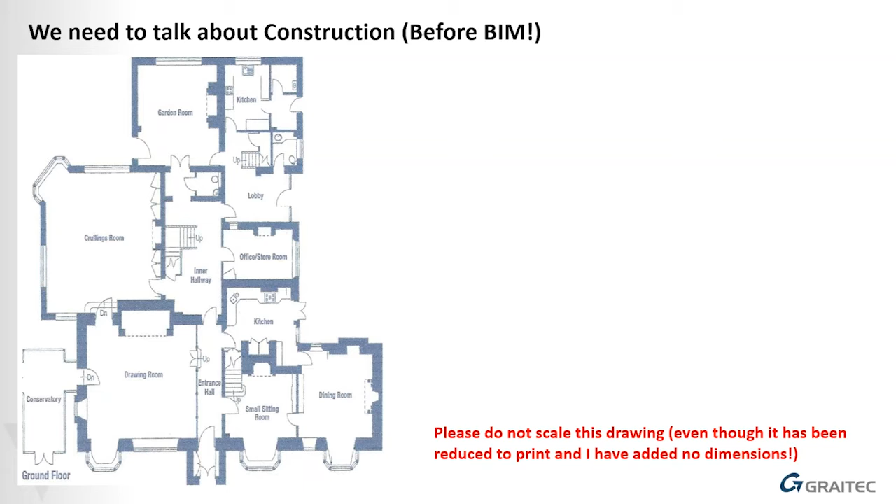So first question is, what is BIM? Before we actually go into looking at aspects of the products, we can consider what BIM is. Before we even start looking at BIM, we need to talk about what the construction is. First of all, the communication of our content, our design intent, what file formats we'd use, what methods we'd currently use, whether that be hand-drawn, whether that be CAD, two-dimensional.

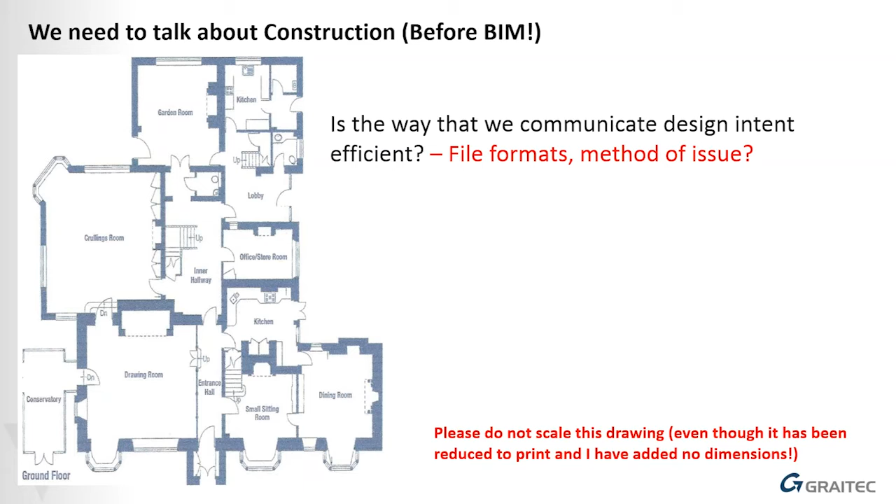We'd also need to be able to collaborate that information with our supply chain. Do they trust the information that we send? Is it correct? How much data do we actually provide for them? And have we looked at taking advantage of other technology that's out there? A lot of people still consider that they're happy with just using two-dimensional CAD and not even interested in looking at other solutions that may be out there.

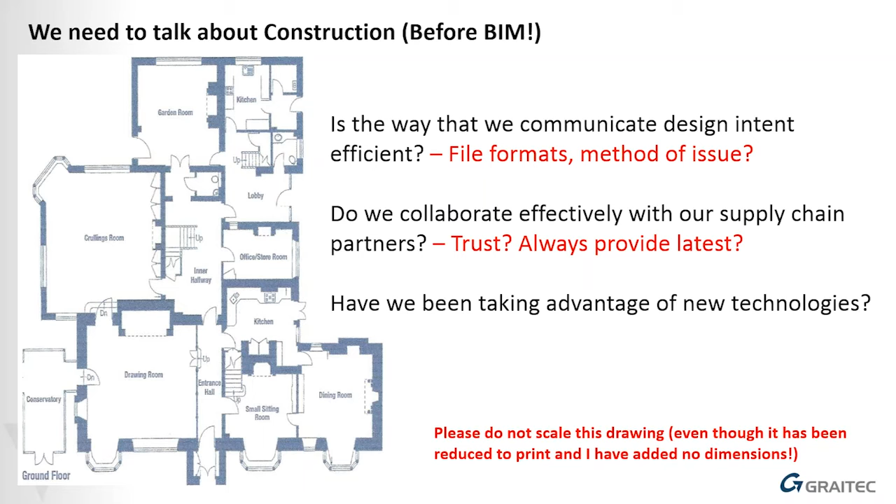Obviously things like Revit are a solution that offers a bit more than what AutoCAD can do, but still produce the two-dimensional information. So if we ask the question, what is BIM? Building information modeling - it's been around now for a number of years. A lot of people may know more about it, some people may not know much about it. But BIM is a process that generates digital aspects of a physical and functional characteristics of a model, or information provided as data throughout the project.

So if we think about this, why would we need to do BIM, and why now? Well, one of the key things is obviously the government is stipulating any government project by this year must be provided in a BIM format.

We've also got to consider that BIM is an intelligent model-based process that provides value across the life cycle of a project. So it's not just the consultants building a model and providing two-dimensional data to the contractor and the client - it's a life cycle, so you're providing a three-dimensional design in a model, but still producing the information in the form of drawings like you would do normally.

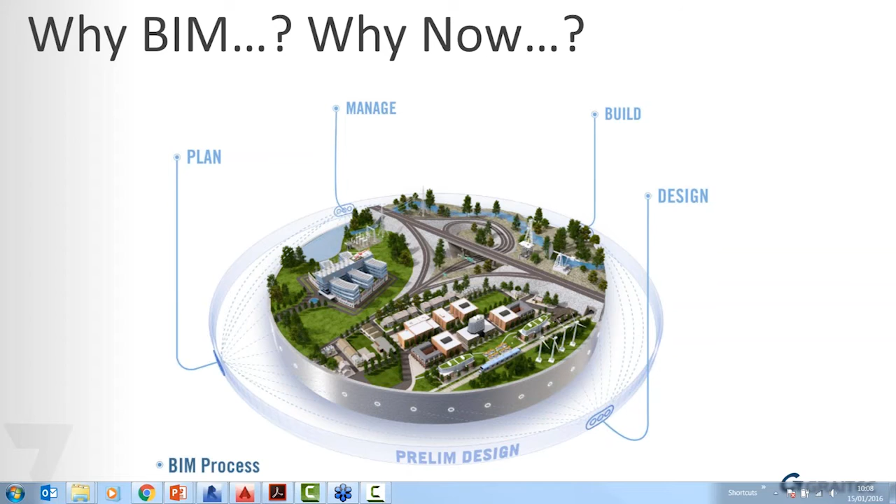And it's a process that's creating intelligent information that can be used in the full life cycle of a building, so it can be passed on from the consultant to all the aspects of the design, so the contractor and the client.

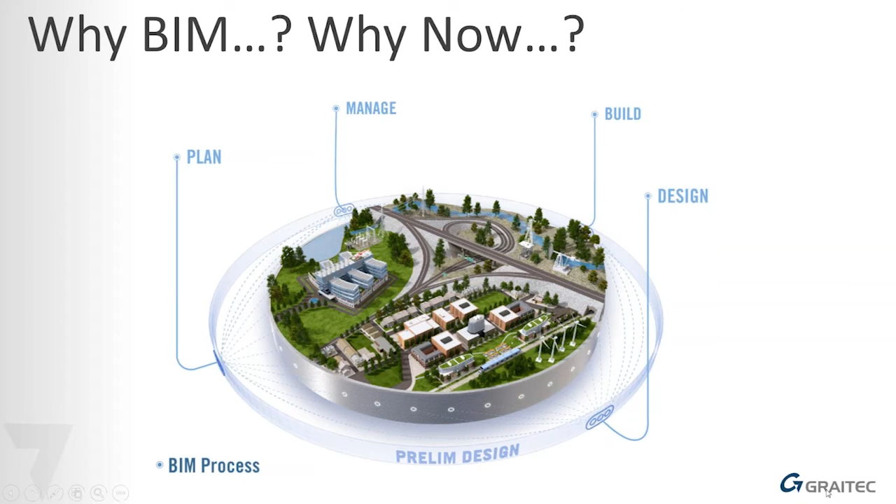If we consider what it can do, BIM drives a more efficient workflow, helping you coordinate information between others, whether that be the design team, the contractor, or the client. It makes for greater precision in information, as you're modelling the full three-dimensional elements of the building or structure you're considering.

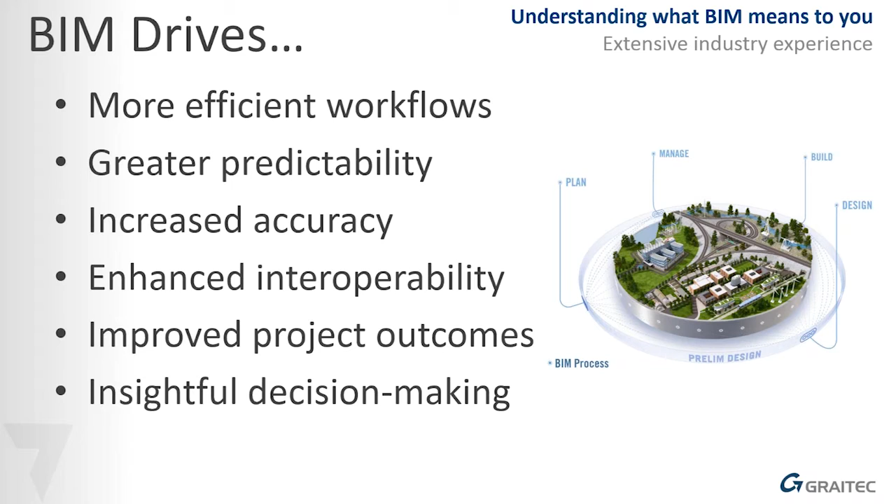It should improve the outcomes you get from a project, because all the data you're providing can be provided on an earlier basis rather than later in the design. It can also inform decision making throughout projects, such as what to use for construction, and if the information is clear and works, you can potentially iron out issues before you get to site, rather than having to down tools once there.

So the advantages of using BIM are that it has the intelligence that allows you to collaborate the workflow better, so you can simulate the performance of the buildings, or structure, or whatever it is you're going to do.

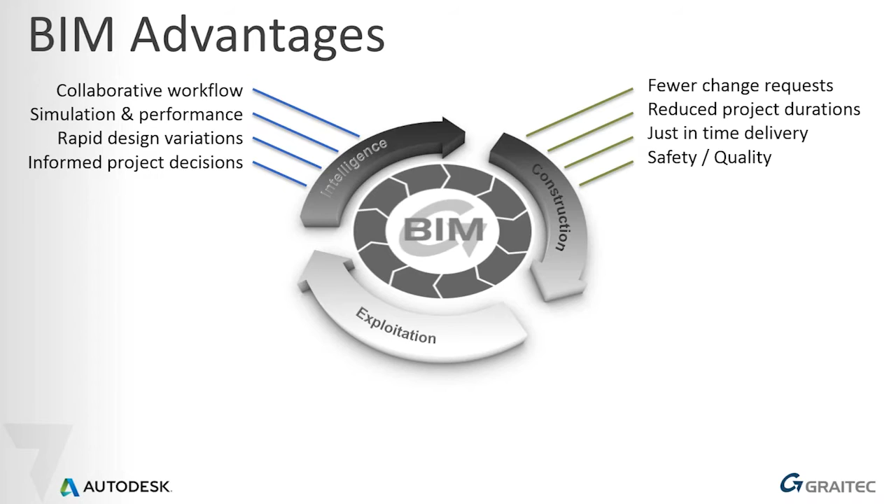The construction should hopefully reduce the number of RFIs you may get, be able to deliver on time, and even look at things like safety before you have to deal with issues on site.

More efficient buildings means you can also look at the analysis of the building structure before you get to site, not afterwards.

You can also produce a fully working, fully graphical model, for example, before you get onto site, so you can see potential issues or potential changes you can look at.

One of the key advantages is that the government is looking to reduce things like cost. Obviously, the cost of building structures today has rocketed in price, so they're looking to reduce that.

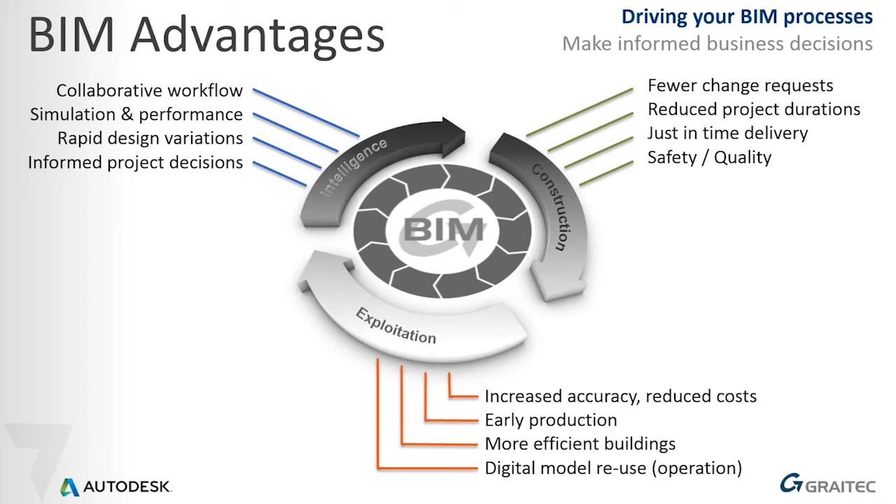So if we look at the difference between your standard old ways of modelling or drawing, you're producing just two-dimensional data. Now using things like BIM is going to help you still produce your two-dimensional data, but it goes further than the standard two-dimensional drawings you had before, producing a model-based design where you can get the two-dimensional information from.

It's intelligent with data-rich information. So for example, you place a door in, you can specify the manufacturer, and all the technical information associated to that door can be placed in there.

You can keep all the information centralized, so it can be saved for later use through the life cycle of the building or structure, whatever it may be, so the information can be utilized again and again.

You can collaborate that data with the facilities, so if anything needs changing, you can have all the technical information stored within that model or in other data sources.

It helps coordinate information more with the supply chain, so you can data drop information from the model and provide that to a supply chain, giving them more information they'll require at an early stage rather than later on.

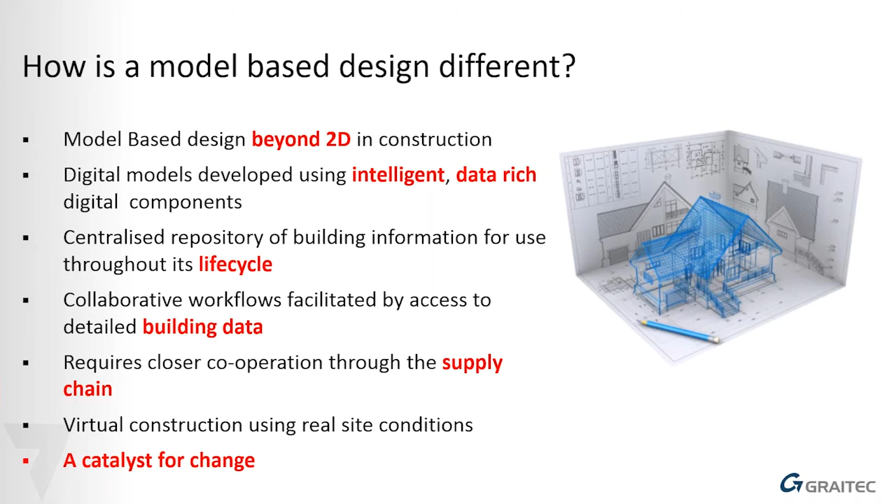And it's a good way to look at your virtual environment before you've even constructed it.

One of the approaches you consider is the design and construction of documentation deliverables. We can build a model quickly for early stage concept, providing the documentation needed. We can also change the level of detail into a more detailed model and perform realistic visualizations if required, for clients to see what it could look like before it's built, so changes can be made if needed.

We can look at construction site simulation, so we can see potential issues on site that we may find. For example, you may need to move some temporary works, put in cranes, etc., and move them on and off site. So sometimes if you've got a site that's too small and you can't store products on the site, you have issues with storage, and we can simulate that with the tools you can use from Autodesk, for example.

Quantity takeoff is probably a key thing, so you want to know the quantity of information in the doors, windows, etc., and look at costing. You can take the technical information from a model and deliver that information more accurately than before.

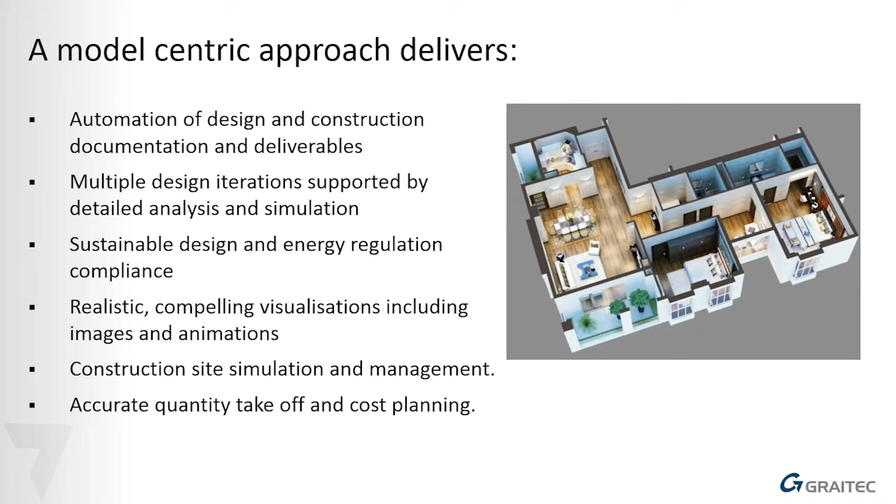One of the key things is that the government has mandated that by this year we must provide level 2 BIM to work on all government projects. Obviously this is looking at reducing things like cost and wastage when working on a project, predominantly government projects, but from what I can see myself and others in the environment, that potentially is happening across all projects, not just government related ones.

BIM has been a fast growing thing in the industry for the last number of years. By 2025 the government and the construction industry are looking to reduce costs considerably, emissions from sites, and greenhouse gases while building construction, and also produce faster construction times, so less downtime with building, more efficient buildings, and improve how we work with suppliers.

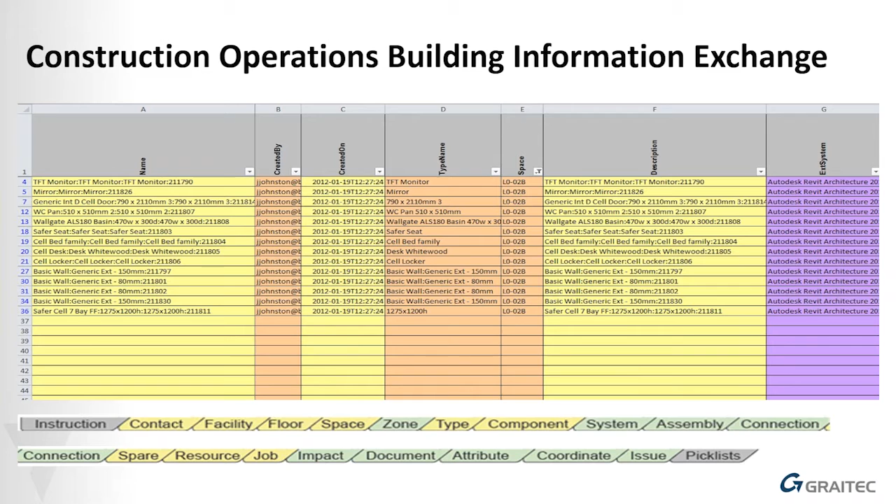BIM itself - some of you may have already seen this graph, it's been going around for a long time, and there are loads of different variations out there. Level 0 we've probably all been doing for many years now. Level 1 is another aspect that's been around for a number of years. A lot of people have been aspiring to move into Level 2, which is more predominantly producing three-dimensional models with intelligent data that you can export and collaborate on with others across a vast variety of industries and contractors. Level 3, from what everyone can see, is not a viable solution yet, but that's where we aspire to be.

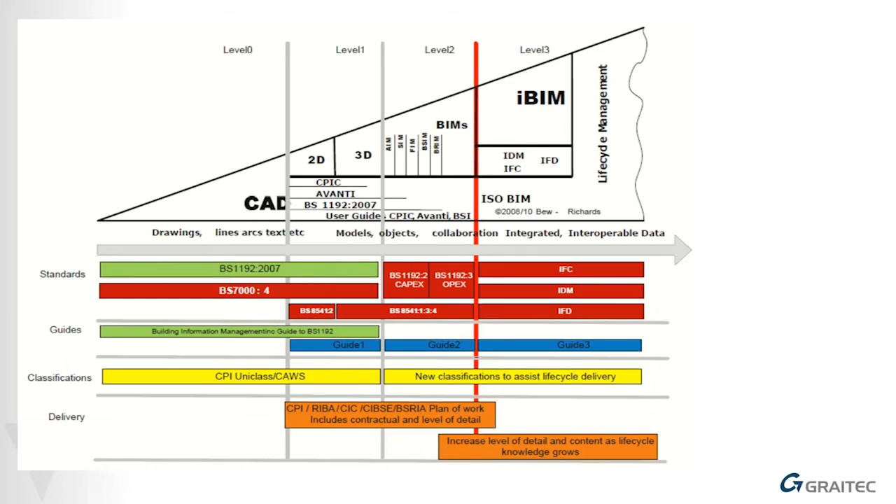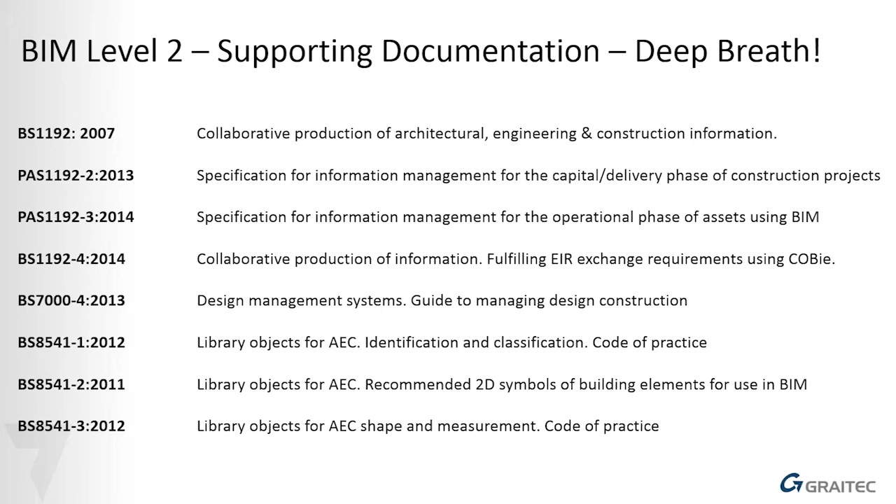For Level 2, there's quite a lot of supporting documentation you can get through British standards - a vast number of PAS documents now, PAS document 2, 3, 4, 5, and I believe 6 now, if I remember rightly. There's a number of documents you can download from the web, plus other documentation like BIM protocols. BRE also supplies some information.

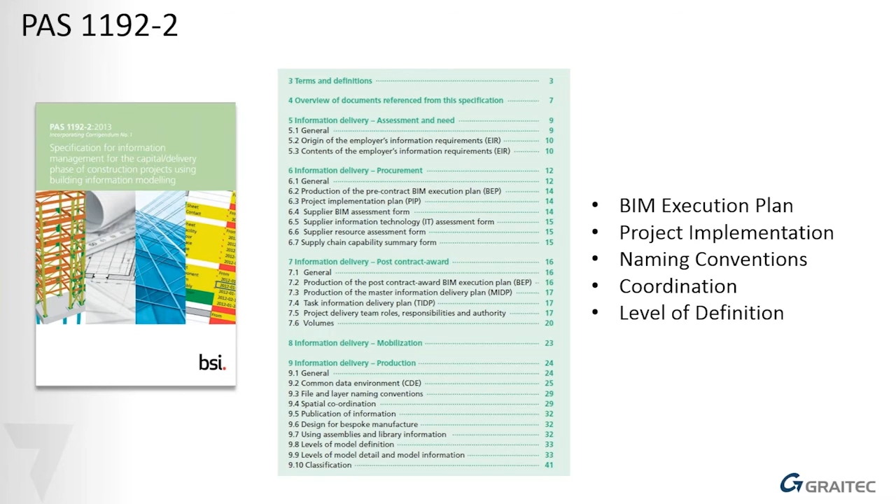PAS 1192 was a document that basically took over from BS 1192, helping you manage your project information - things like naming conventions, coordination, the level of detail that needs to go into your models, and BIM execution plans. It tells you about the project and how you should manage the data and what levels of progress you should be at, so you can distinguish whether information is from the working project you're currently on, being shared with others, being checked or approved, or going on the lines of completed.

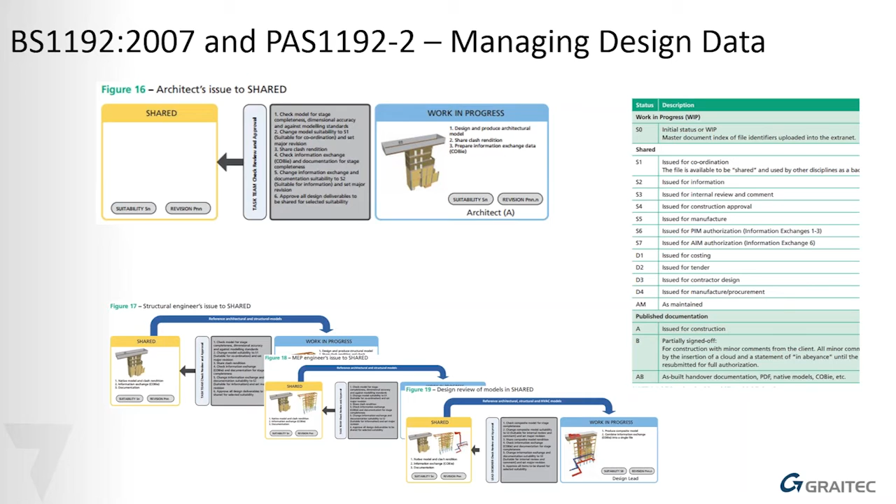Level of detail - you may be looking at a very early stage concept, where the detail of information can be kept quite basic, in the form of shapes and massing, going all the way over to handover, where it's a fully detailed concept model with all the components required within the building.

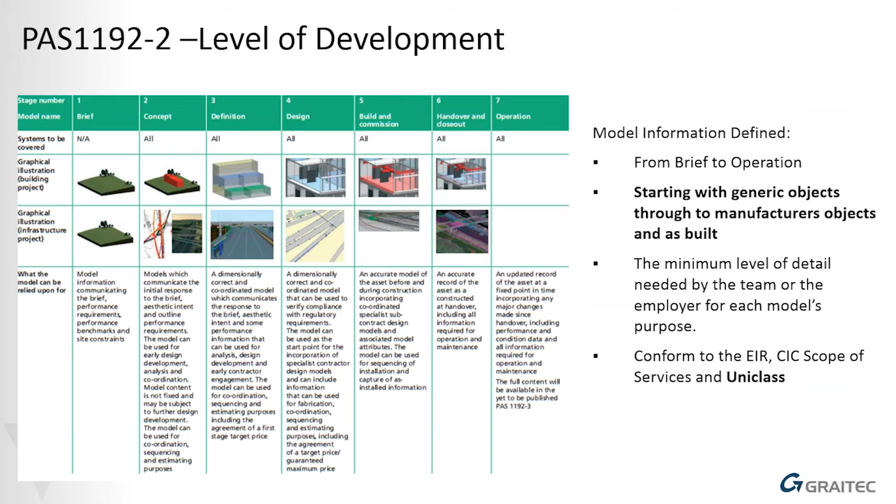BS 1192 looks at layering names and things like that within your models, drawings, etc., so all the information can be provided. It knows where it's come from, and the information is clear with all the data provided in that drawing, model, etc.

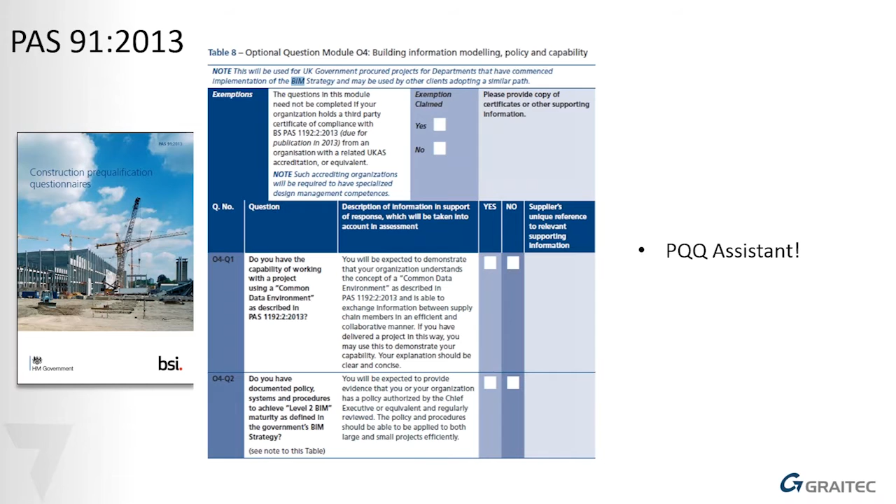So there's obviously things like PQQs that need to be answered within a project. You can download data from the web, from the BSI, which will help you fill out those PQQs.

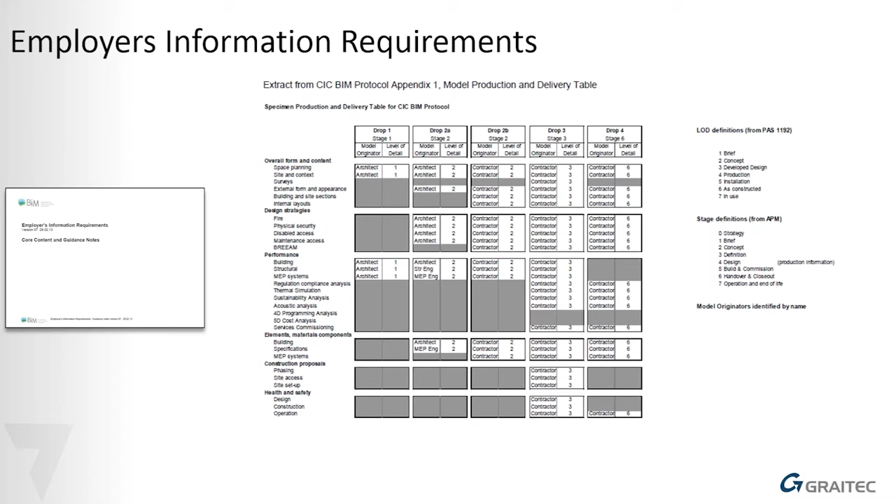Employer's Information Requirements is another content that you can get from the web, which helps you with all the data and information that employers require from BIM.

Moving on a little further, asset management. As you take the information further, there's PAS 1192 Part 3 that will give you that information. It's a lovely good read.

Some of the deliverables and goals that you can provide within the projects, what information is required at levels, and the data you're going to provide within the model.

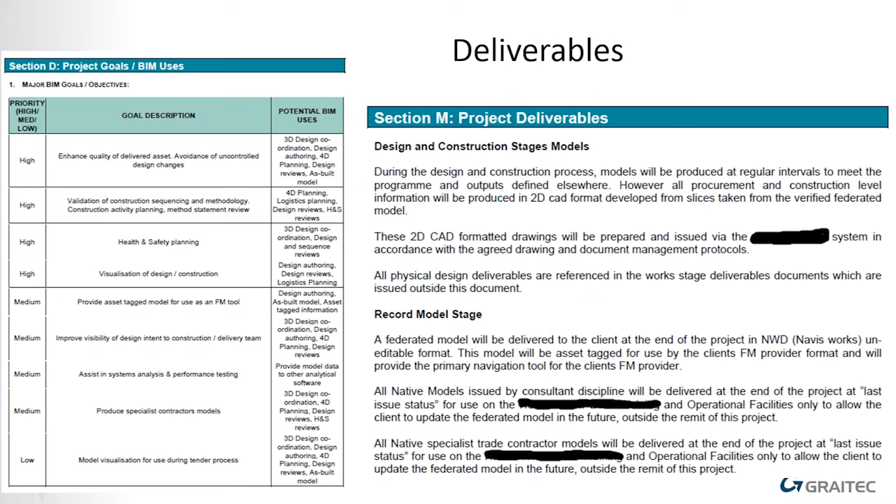There's a nice little document for any house builders you can download, which explains a bit more about BIM and how it looks within the house builder's environment.

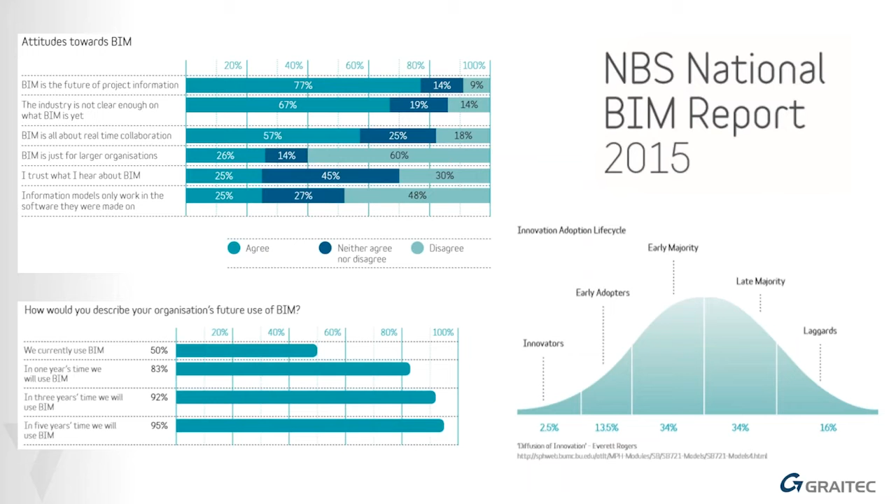Another nice read - the NBS do a national report generally every year, which tells you a bit of information on the kind of people using BIM, what they're using it for, how they're getting on with it, and what percentage of the industry is currently using BIM.

Okay, so let's have a look at a demonstration. I'm just going to pop into good old AutoCAD. A lot of us will have started off generally with a CAD drawing, so let's quickly open one up. When we're working in AutoCAD, we produce our CAD drawings.

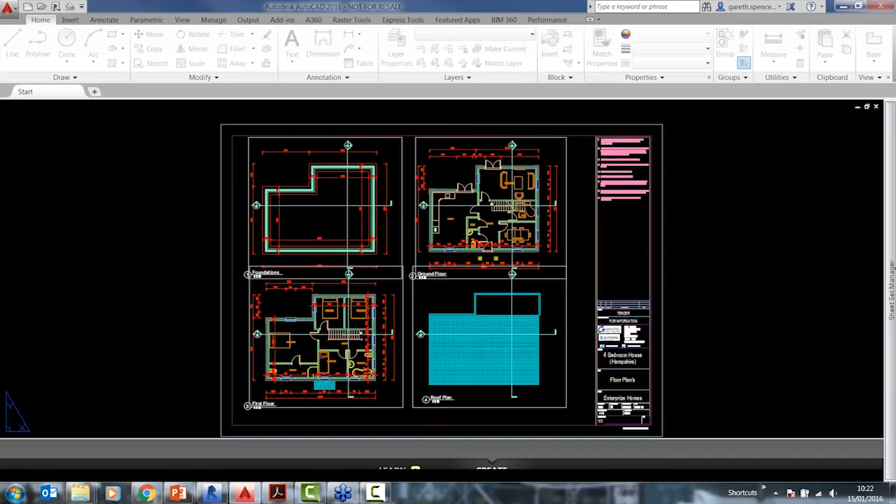Now, the problem with the traditional method is we may produce plans, sections, elevations, and the biggest problem is if I need to change my drawings - for example, here are my building elevations, I've got a simple house and my plan views - I need to consider that when updating one thing, I need to update the other.

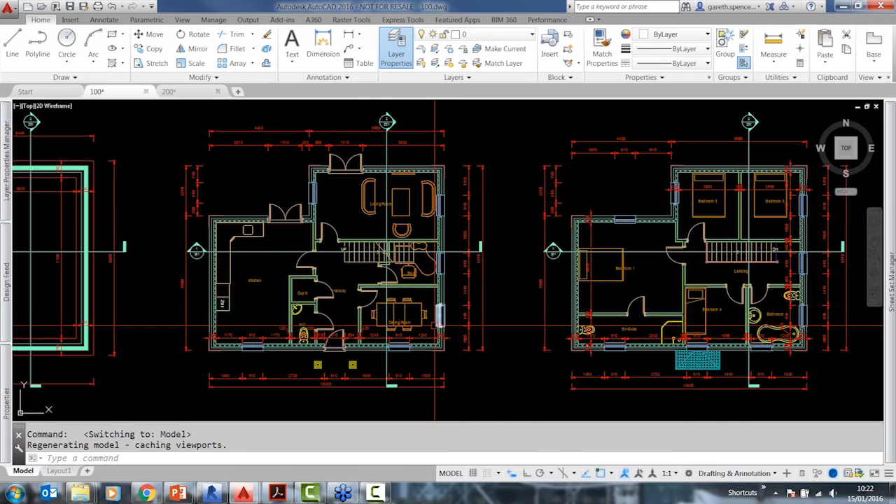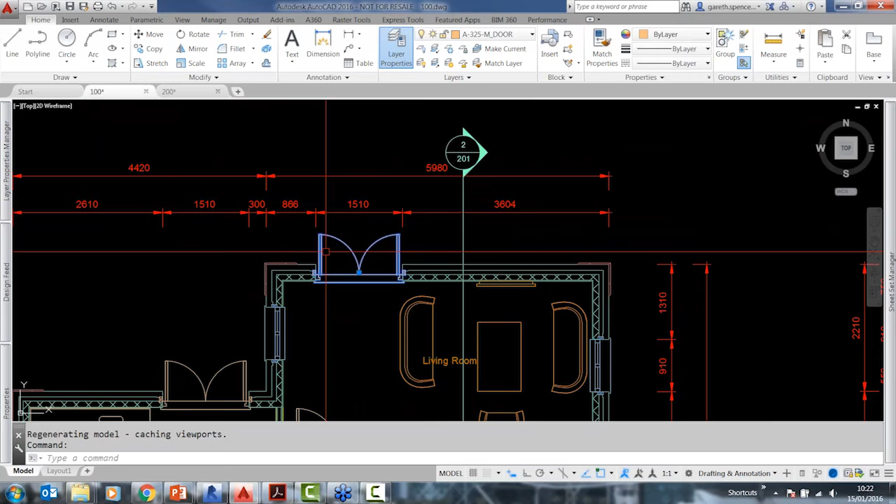For example, if I want to update and reposition this door, it's not as simple as just updating this and everything updates. I need to update my plans, sections, elevations, anything appropriate. I'll also have to update specifications if anything changes, any schedules of data, and supply that data to my design teams and consultants working with me on the project. So for me to update this, I've literally got to change one thing in here.

So for example, I want to change this - I'm going to move this over by a set distance. It's not as easy as just simply going in and doing that. I've changed that, but you can see the hatch pattern hasn't gone with it, my dimensions haven't gone with it, so I've got to edit that.

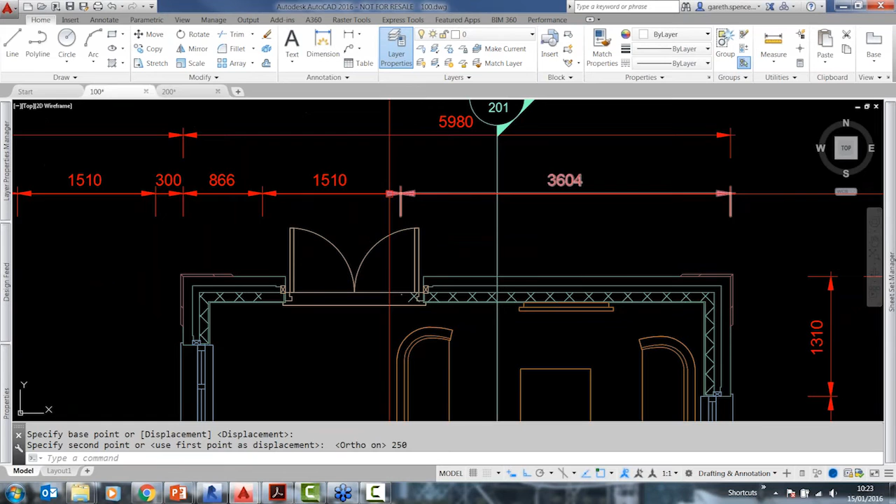I've also then got to go into my elevations, update that, and any sections or details that may change. It may even change the style of the door - I've got to select that and load in a new family, which can take time, and I can also miss data.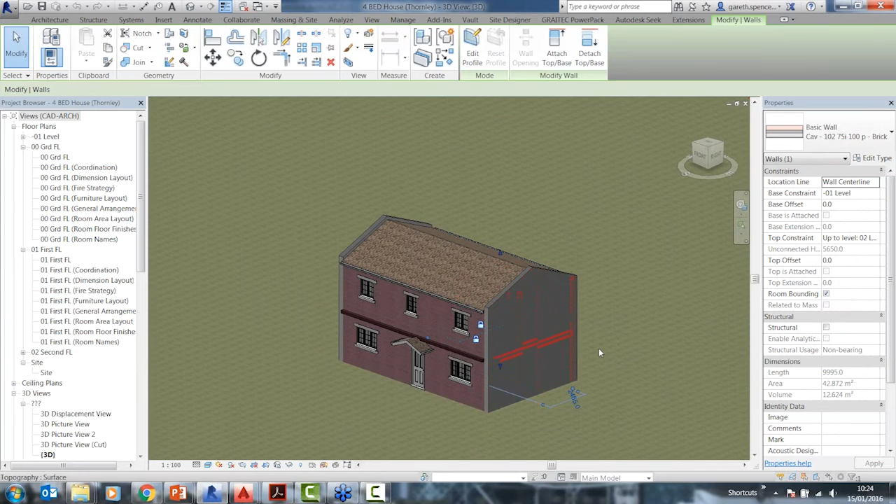We can not just put the information in as visual, but all the technical data is in there as well. For example, I can create all the different plans, sections, elevations that are required. I've already built up a model, but if I need to change something - for example, if that wall needs to change - I can come in here and simply update and move that wall. What will happen is every plan, section, and elevation will move within the project at the same time.

So if I just take a section view through here, you'll see I can instantly put a section through to here, through the building at that point.

I can change the level of detail, hide information, change the scale of the view. I can hide all these in the view here, I'll just select them and turn them off for this view. Okay, so you can see there's the view.

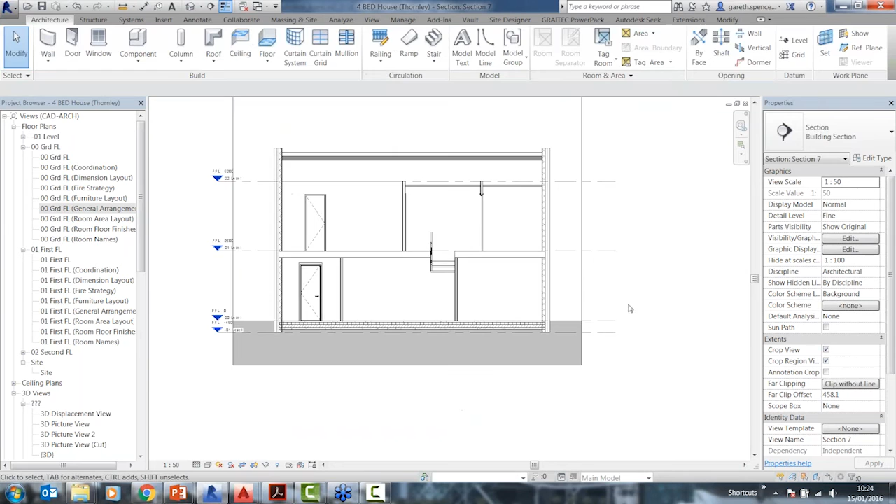I can come into this view, although this view being that wall here, I can put on some dimensions. I'm going to quickly fire in a dimension here - I'm going to pick on the wall and put a dimension to just the wall here, so you'll see that's the current dimension of that wall. I'll switch back to that plan and do the same in this view, so you'll be able to see I can place data along there.

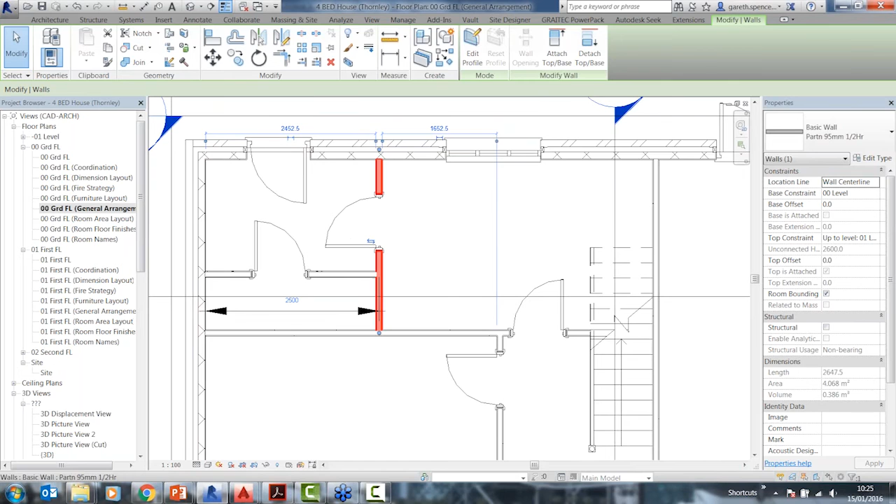You'll see there's the same dimension. Now we can make the drawing a bit clearer if needed, but I can select that dimension and change the value. So if that wasn't quite right and I need it to be 2.5 meters, it's going to move it over for me instantly. It'll also move it over in the section view as well. If you switch back, you'll see the section views updated. So the potential of me getting issues is minimized, because I can fix them in the model.

And it will update all the relevant information. If I need to change, for example, a door, I can simply select the door. I can go into the properties, select and change the door size, type. I can even load in a new manufacturer if I need to do that. So all the information is quickly changed without having to go back and update my plan, section, elevation, or other information. All the data is stored in one environment.

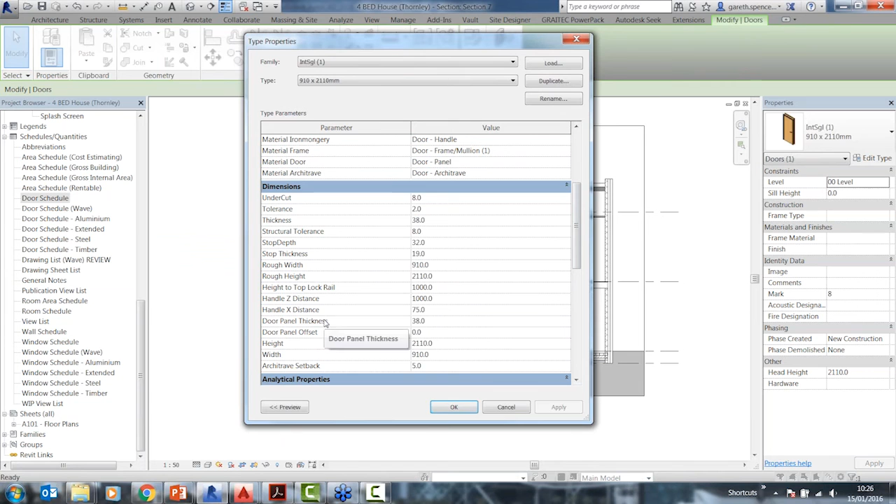So for example, we can schedule all this data within here without causing any potential problems. I've got a door schedule here with all the technical information. I can apply that technical information inside the model and instantly get that data out on all the information I require. So for that door, I can put some property information in. I can put some technical data, like what the material is, what the sizes are, and who built this - the manufacturer. We can put all technical data within here associated to that element.

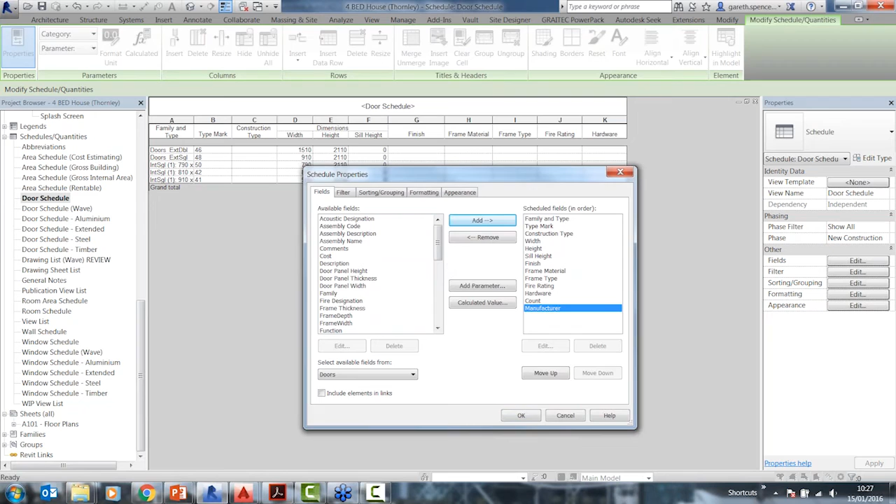All that information can then be added to this table. If I go into here, there's some information already, but I can add more where required. I can, for example, put in the count so I know how many there are. I can come down here and add the manufacturer. Now these are just the basic information that's in the actual families within Revit. We can also add further data where required. If I hit OK, you'll see it's now updated with the information.

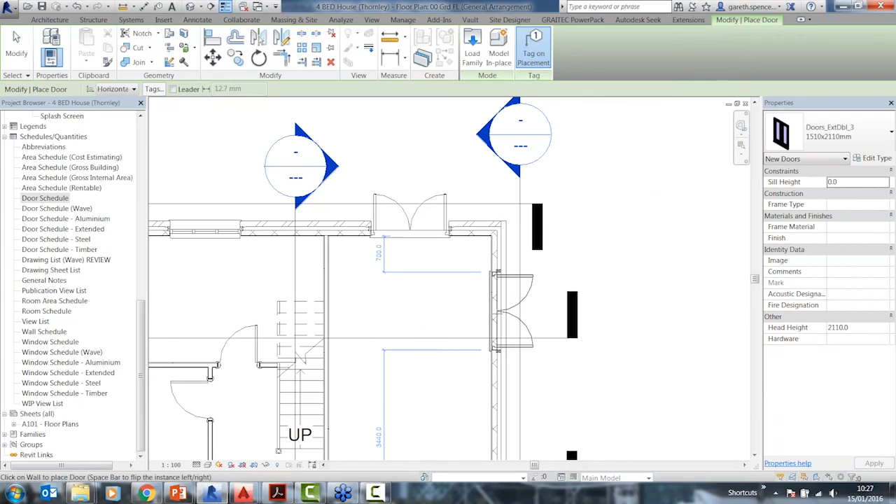Now as soon as I put more data into the project, I can get it in the schedule and it will automatically update. I can select this information, go and highlight in model, and you'll see it's now taken me to a view and placed it. I can select that and go create a similar one, and as soon as I do, you'll see it's helping me place the door inside there.

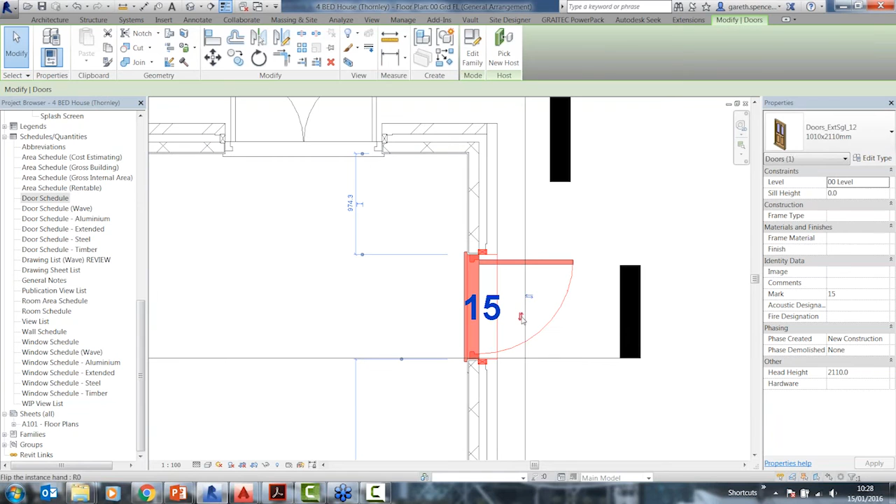I can select it and change the orientation, so the actual swing is internal or external. I can change the door to, for example, a single door. Revit will automatically switch it over for you and cut the wall back appropriately. I can adjust the swing, and all that information will now be back in my schedule, so all that technical information is in there. We can also tag the data up with the door number and name, etc. So it's an instant change and instant information without having to do more work.

It's live, it's quick, it's easy. All this information can be provided in all different floor plans and elevations. For example, I can go to my first floor and show the information, and you'll see I can hide or show the information below as well.

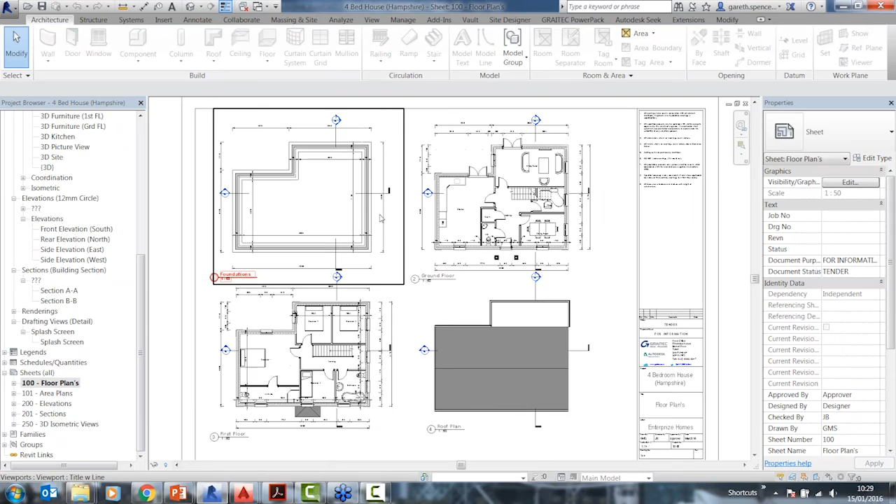If I just open up another model - rather than show you everything I need to do, I've already created all my views. For example, there's my foundation with some dimensions on, here's my ground floor with all my furniture showing and some dimensions again. I can easily populate a drawing - here's one with all the drawings on, so you'll see I've got all my floor plans already in the view.

I also have one with all my elevations and sections, and if required I can put an isometric model view together and put that onto a sheet. As you'll see, there's all the views, and it's a simple way to do it.

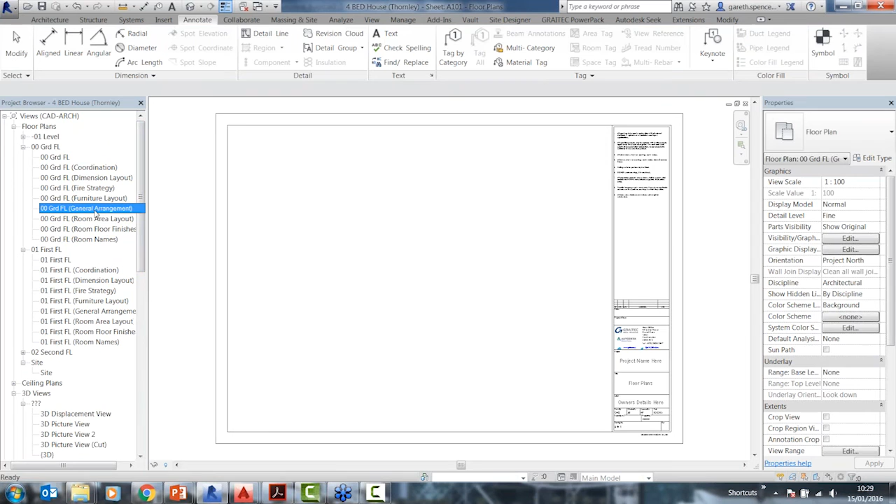If I switch back into here, I can simply select the view that I want from my drawing. For example, this view here, I can drag it across and place it. As you'll see, the view is a bit small there, so I can go in and, just like in CAD on the viewport, minimize things down so I can see the area I want to see in the view.

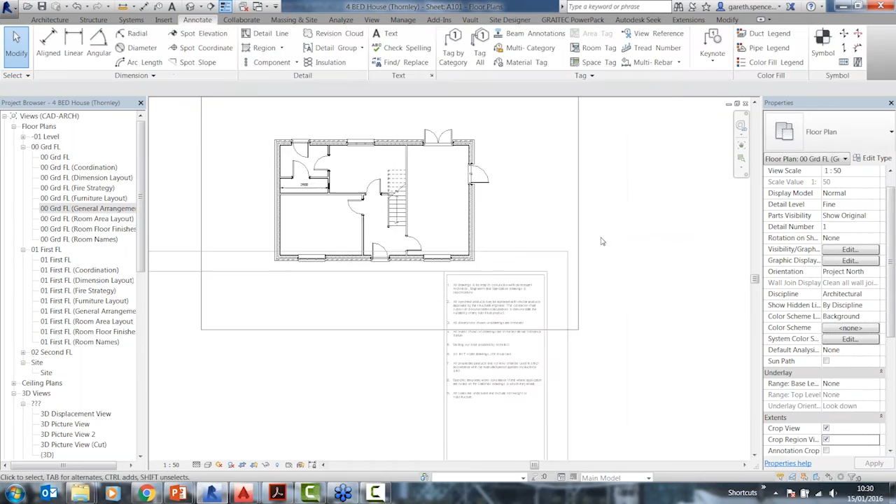I can also change the scale and adjust this appropriately. For example, I may not want to see these in the view, so I can hide them or turn them off within the view. I can hide that viewport and reposition this on here.

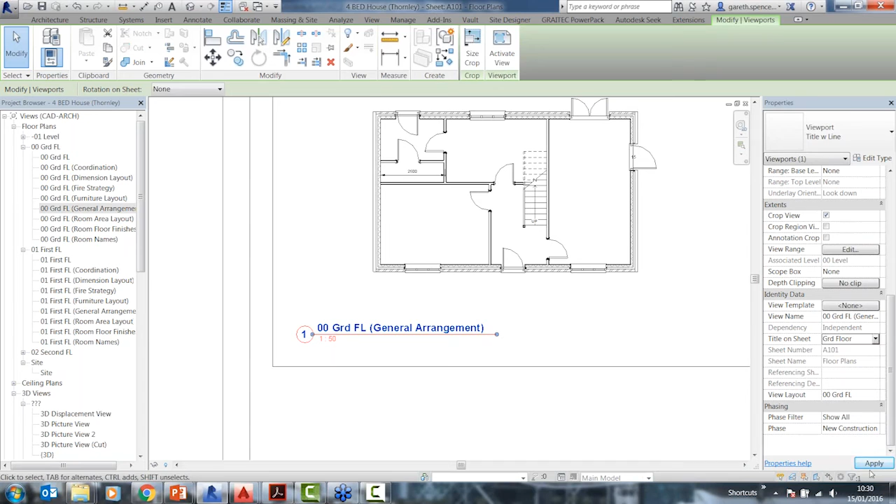The intelligence behind this allows me to put things like a tag associated to the view, which will give me the scale, but it's looking at the name over here, which we can change as well. So I can say, for example, this is the ground floor, and this will automatically update appropriately. All this data is being added and information is updated, and the intelligence behind your drawing will put things like the scale on for you.

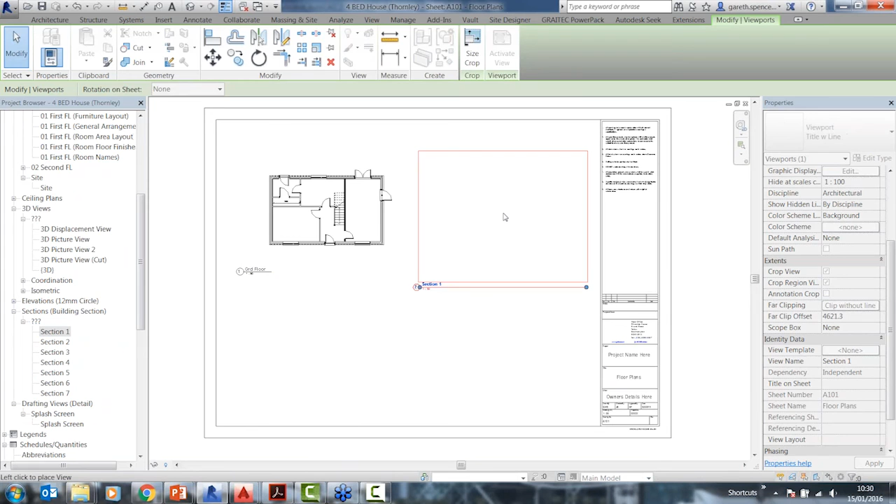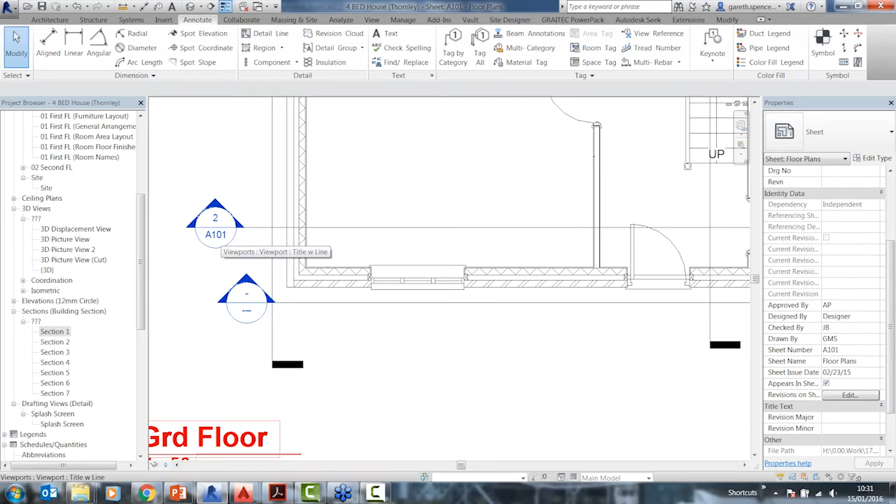Now because I've got the section markers turned off, I won't see this, but if I put a section view on, I'll show you in a second when I turn them back on. I wanted a section view onto here, and it will place it on the view. The section will automatically update appropriately for that view and allow you to indicate which drawing it's on. It's impossible to change that unless it's a manual override, so you'll always know where the section is, so whoever reads the drawing can know that drawing sheet is 101 rather than going, well, it's not 101 now, where is it? The only way you'll get that wrong is if you don't use the sheet.

So all that information you provide, whether it be in 2D format, can be exported, you can print it out and take it out further.

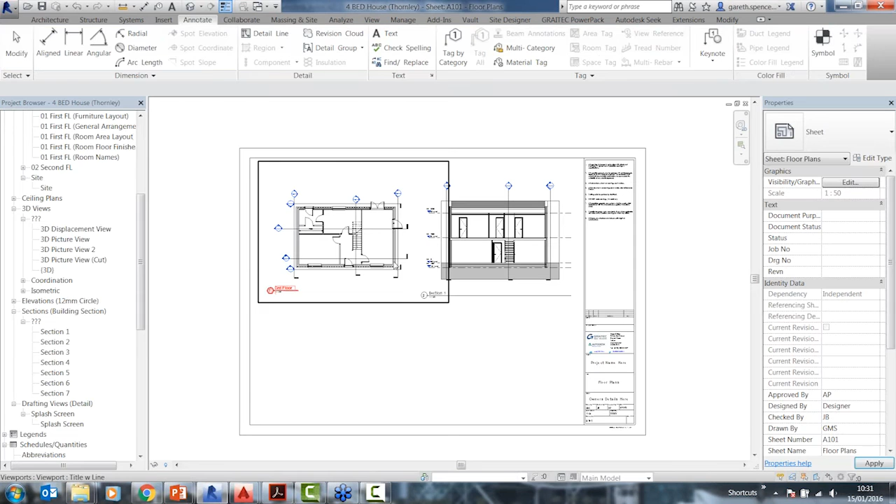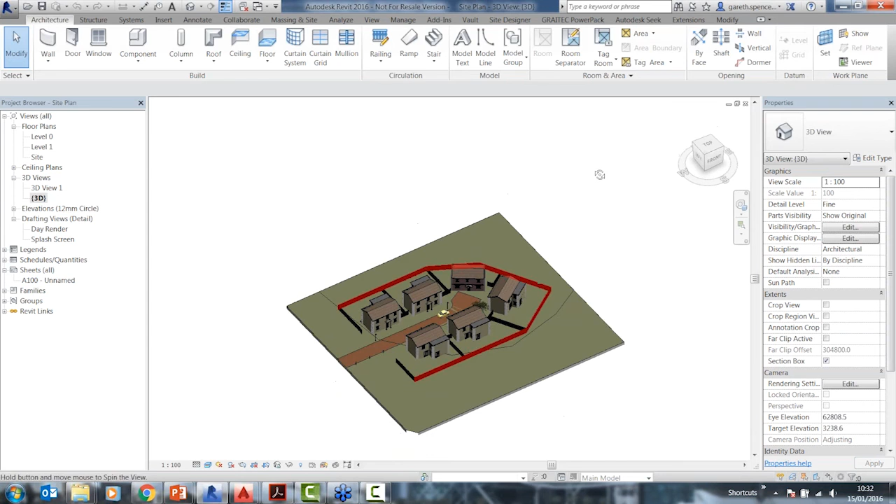Now what I've done here is I've taken this a little bit further. I'm just using Revit here, but you can use other applications. I've produced all this information and popped it into a site. So what I'm doing here, when this opens, this is a site model. You'll see here I've linked in all those objects, so I'll just zoom in here.

Now I've just placed in the same ones. Obviously it can change for a project, but the thing is, if that changed, all these, because they're exactly the same, will update as well because they're linked through. I don't have to update this model in any way, shape or form. I can update the linked model, which will update this one in its entirety.

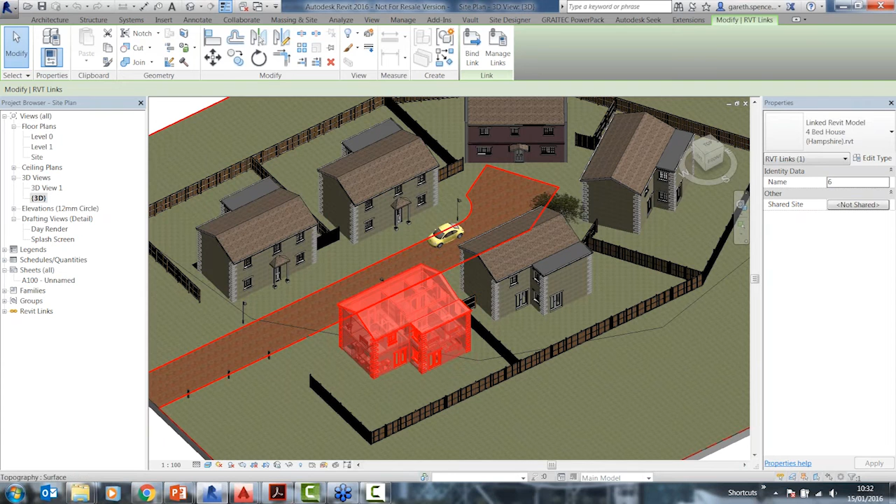I can, for example, populate all information. Now I've put a few things like trees and street furniture in, a few things like some fences up around the actual project which I can model in, which makes it easy for the user to visualize as well.

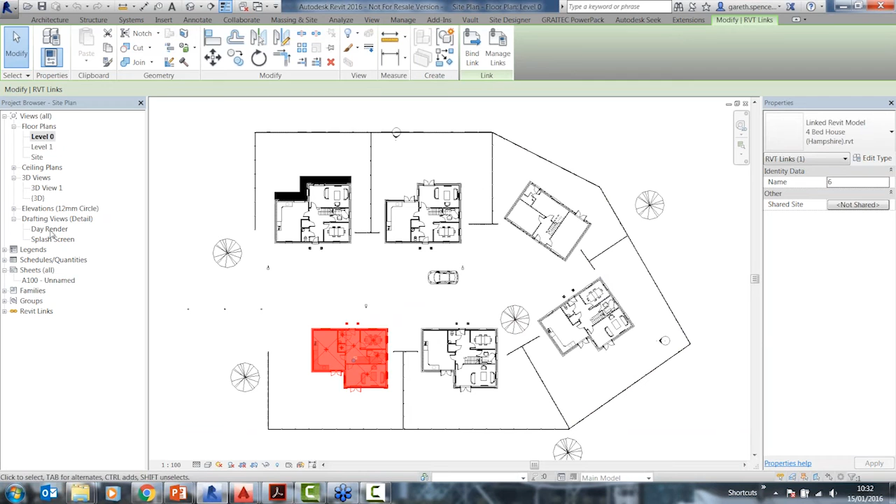And if we take it a bit further, now I've done a quick render. I used the Autodesk 360 account to do that. So basically what I did within here, I set a view, I pointed the view at the project, and I took a render picture. It's obviously introduced things like shadowing, so I can specify where the sun is in the sky at one time.

If we put the objects in, you'll see it's rendered the car, it's rendered some trees. I've got some lighting in here, so I can actually do a night type render as well, which helps us coordinate information a bit easier. And potentially for your clients, you can see this information.

We could actually take those Revit models into things like Navisworks for your timelining, for your project and your quantity takeoff. We could even go further for an early stage concept. We could take it into things like InfraWorks and Civil 3D for your site, so we could look at what needs to be cleared on the site, so cut and fill, the road design, etc. Within here, so we can coordinate information within our products.

Now I said I did a render. So what I basically did, I took a render and I popped it up to the cloud, and rather than leave my machine rendering, I popped it into the cloud and got the cloud to do it. So that rendered for me within the cloud, which saved me time and downtime, so I'm not sat there while that's rendering. I can actually carry on with building up the model and changing things if needed to. Obviously, to do that, you need to use your cloud credits.

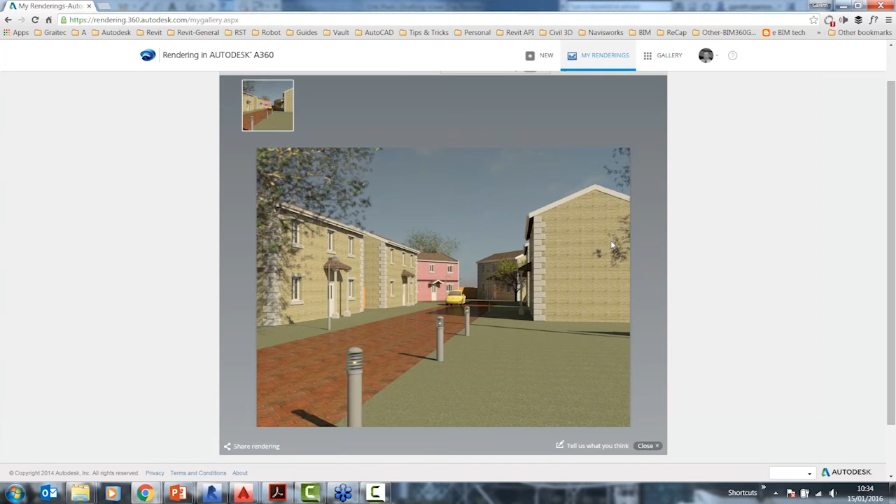You do get some free with the products that you buy, and then you can buy others if and when you require. Alternatively, I could have used, for example, when I took this view of the project. It doesn't look great at the moment, but when it renders it looks better. You'll see I can literally click render, apply all the settings appropriately and do the render. I'm not going to leave that going now because I'll be sat here for a few minutes, and I'm sure you don't want to sit here watching things render.

Using the tools, we can take the information, change it, and it will update across multiple data. So for example, in the model here, if I'd have changed that linked building, it would update automatically. That makes things a bit easier.

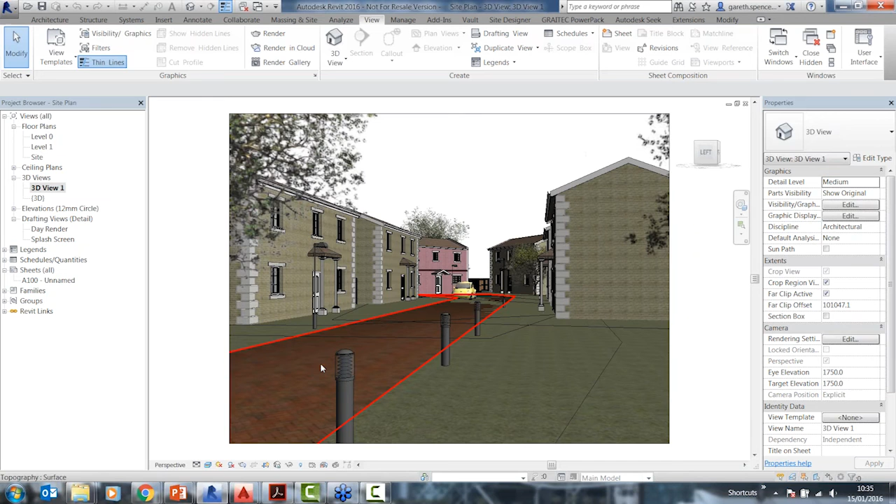Using these tools is going to help you move forward, take the information, make it clear. For example, if you're on a new building site, rather than just showing 2D plans or a nice pretty picture render, you could use things like 3ds Max to do a nice rendered walkthrough, so you can show potentially what things could change. You could even show the different styles of kitchens in the building construction, with nice little rendered pictures of all the different styles for clients to see.

So, a couple of things to finish up on.

The services that Graitec can offer - we are a consultancy house as well as a reseller. We can help you with your BIM protocols, help you standardize your templates, and help you move forward and implement all this software, so you don't have to sit there thinking, okay, what do we do next? How do we do this? We can come along and guide you through that process.

We have a number of professional services within the organization. We have people within our company with multiple disciplines and technical knowledge to help you move forward in the areas you require. In the UK, we have 29 technical heads split across the AEC and manufacturing space, which allow us to dip into all different types of knowledge where, for example, if I may not have the knowledge in a certain discipline, I can go and speak to a colleague and get them involved to help guide you forward with the best solutions we have. Most of us have come from industry, so we know about the industry and where it's gone and where it's going moving forward. We are experts in our field, so hopefully we're able to help you with what you require and what you need.

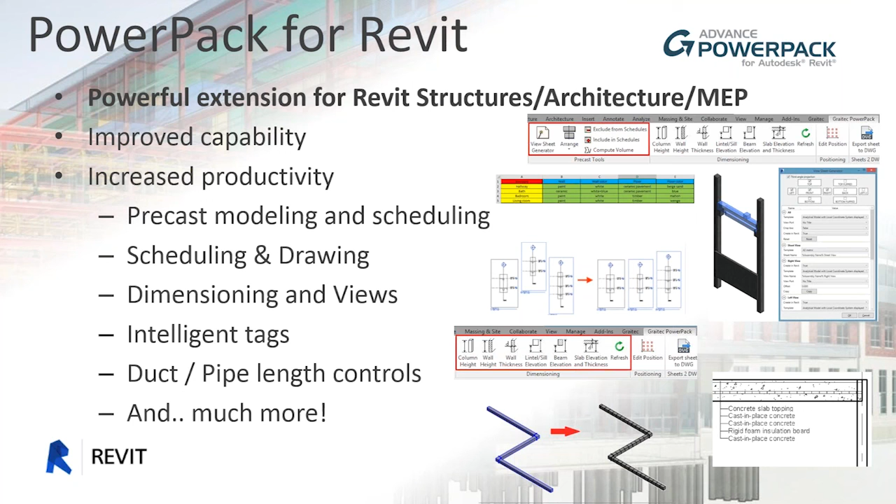Other suites to consider, from the Building Design Suite, include the Infrastructure Design Suite. Again you can get AutoCAD, Civil 3D, Map, and the Revit application, Navisworks, and Robot if you go to the Ultimate suites. But one key thing in there, really good for early stage concept work, is InfraWorks - a very good tool you can utilize.

You've got a site, you know where that site is, and you can get free data which you can download from the web and put into the model, so you can see how the model looks before you even start doing any design.

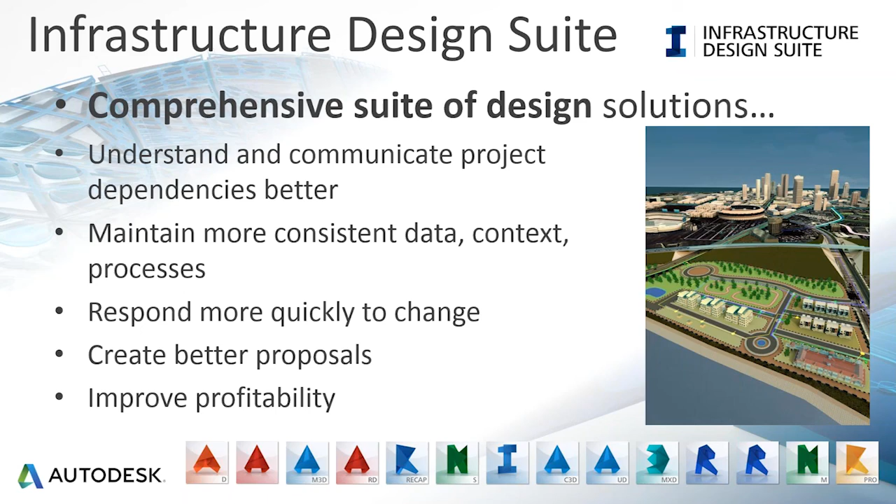Just to remember, we are here to help you. We've got plenty of people within Graitec to help you, to hold your hand, realise the power of what BIM can offer, and move it forward for you rather than sitting there scratching your heads wondering what to do next. We've got tools we offer, and we can hopefully help guide you forward. We also have a team of developers, so if you need something building, we can do that for you.

I hope you found that useful this morning. It's been quite an interesting presentation on what you can do with BIM and moving forward. So thanks for attending, I hope you all enjoyed that.